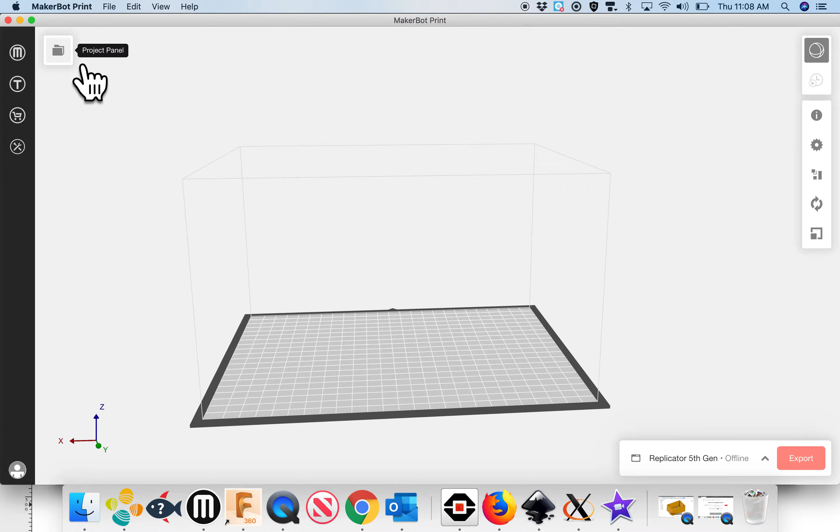You have the tools over here on the right. There's some print settings. There's position, rotation, and then the size or scale of each of the STLs that you bring in. Over here you've got the project panel. You open that up and we can add models to the workplace.

And so this is the printer right now that we have. It's the 5th generation Makerbot Replicator. And so this is showing you what the print bed for the Replicator is. So we're going to go ahead and add models. I've got, let's see, this recessed one. So there's my handle, my lid, and my box. I can bring them all in at the same time, or one at a time, so I can show you.

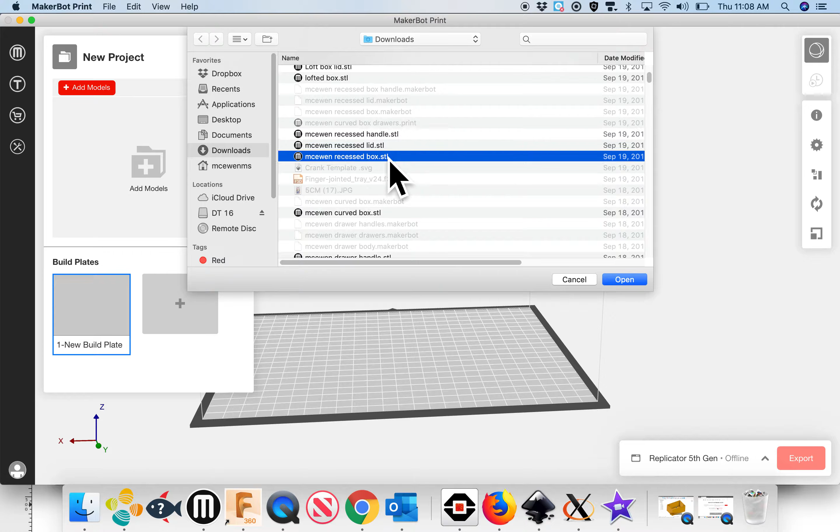Here it is. And again, for some reason that is beyond me, they are coming in not the correct size. So look at the scale, 10, 7, 15. So we're just going to make this a little bit bigger, and we'll go over how to scale correctly. So when you click on one of the pieces, it has a blue frame around it, and you can use the tools to do things to it.

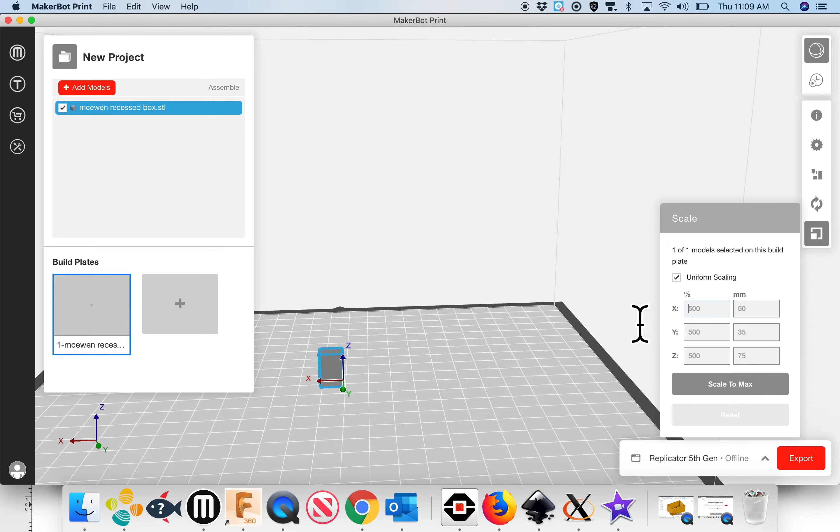So I'm just going to increase the scale by 500%, and it's going to do it across the X, Y, and Z. So if I press enter, you can kind of just see the box just a little bit better. If I click on it, you can tell that it is 75 millimeters tall, 35 along the Y, and then 50 millimeters along the X.

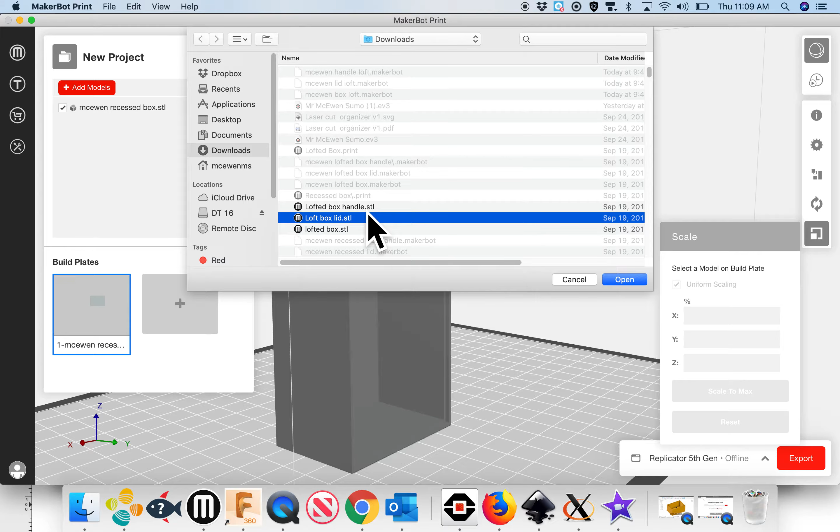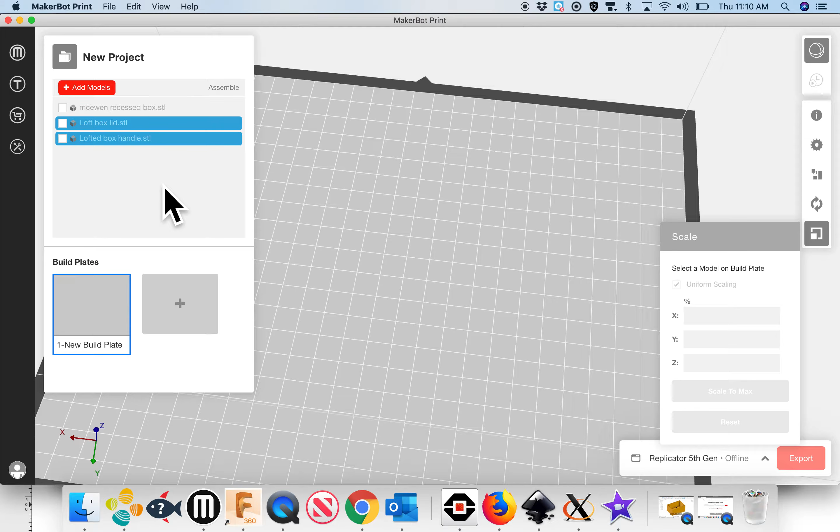Okay. So I'm just going to bring in the rest of the models as well, the lid and the handle. And since they're in and they're already highlighted, I'm going to do the same thing. I'm going to increase their scale by 500. Wait a minute. Those are not the right ones. Those are for a different box. So I'm just going to turn those off, turn my box back on, and I'm going to go ahead and add the correct model, oh, here it is, the lid and the handle.

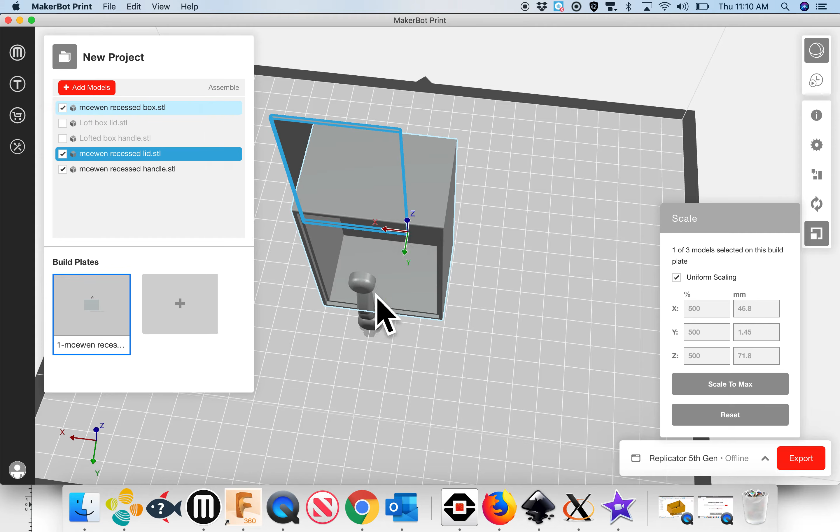And there they are. It doesn't matter they're sitting on each other. We'll fix that in a little bit, but I'm going to make them the same size so I can work with them. Okay, so that's the scale tool. If I click on one, I can see the scale for that exact piece, and I can turn that off. I can change these to whatever I want, but I'm going to keep the uniform scaling on because we need to make sure that all three pieces are the correct same size.

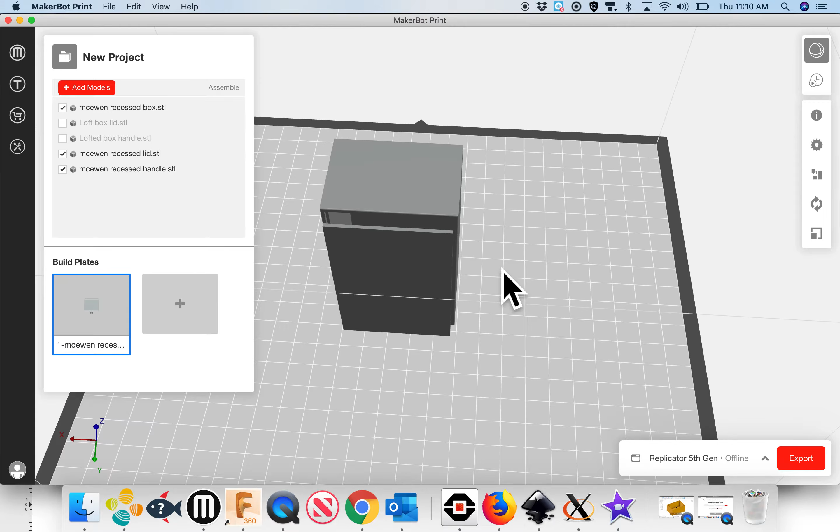So for right now, one thing I do right away is I click on Arrange, and I just say Arrange Build Plate. And you can use two fingers pressed to rotate a little bit so you can see they all now could be printed like that. But this would involve a lot of support material being printed inside so that it can print this top part. So we need to rotate them.

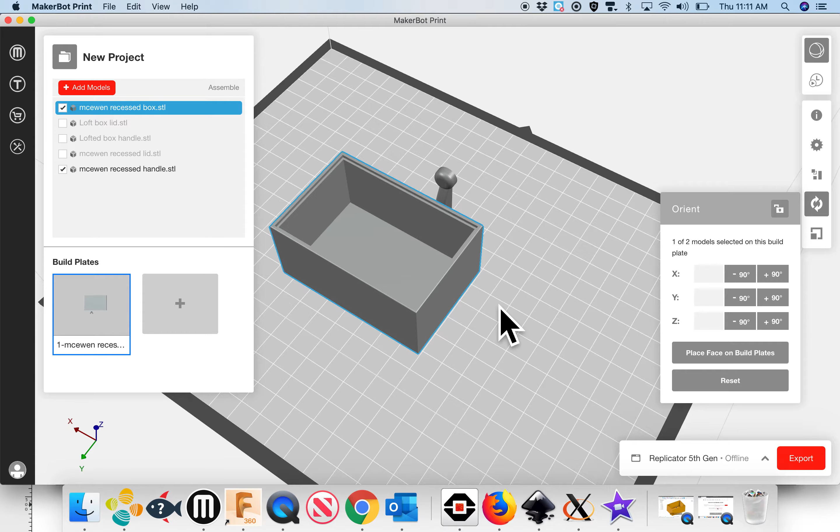So I'm going to do this with each one of them. I'm going to click on the Orient button. It's the little rotation button. And then I'm just going to click until I get it the correct way. This is how we want to print to avoid supports.

Same thing here. Let's see. Do I do this? No, that's going that way. So there's a little bit of hit and miss, because as you rotate around the bed, you're changing where the directions are. Okay, so that's right, but I want to flip this over. So I could do these rotations till I get that, or I can click on the Arrange button.

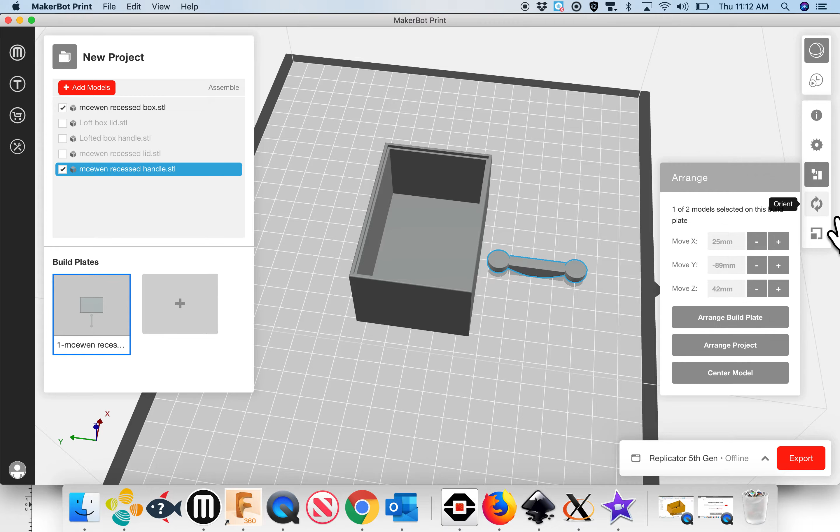And I can click on Arrange Plate. Oh, I'm sorry, Place Face on Build Plate. I'm going to click on this one, and I'm going to say that's the bottom, and it just flips it over. So again, play around with this a little bit with your pieces as you bring them in, move them around, flip them over, arrange it so that you can get used to using these tools.

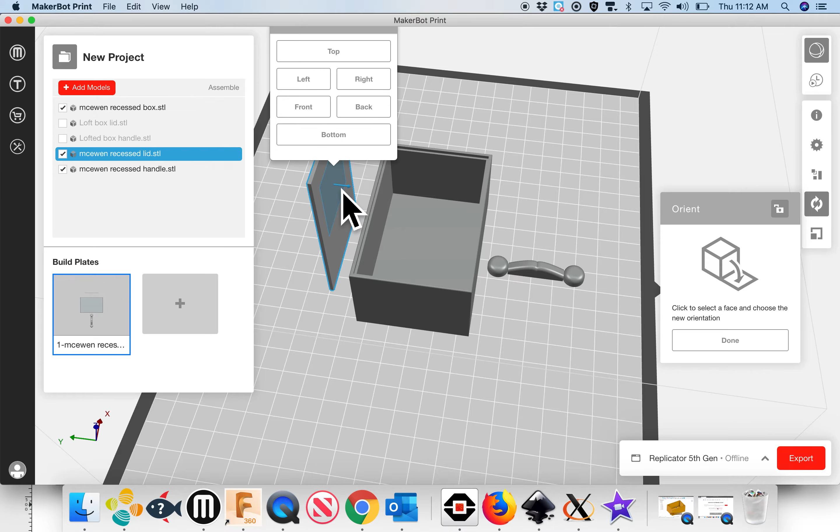Okay, so now I've got this one. I'm going to click on this. I'm going to say Place Face on the build plate. I want this to be the bottom. I think that's right. Okay, I'm going to go ahead and click escape. So I already got that. I'm just going to grab this, put it over here. And let's just say arrange build plate.

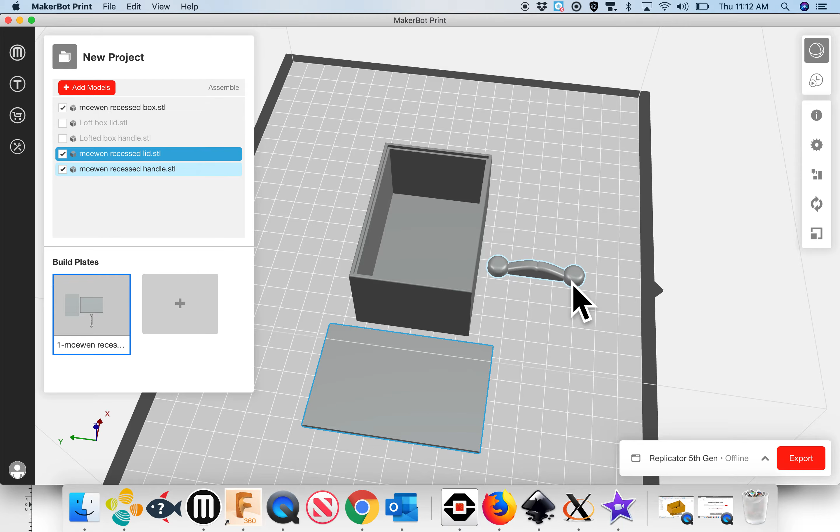Okay. So I've got my 3 pieces. They are separate, all 3 of them are ready to print. So I could, at this point, just click the export button. And then I would type in my name and what I'm printing. Okay? This is a recessed box with a recessed lid.

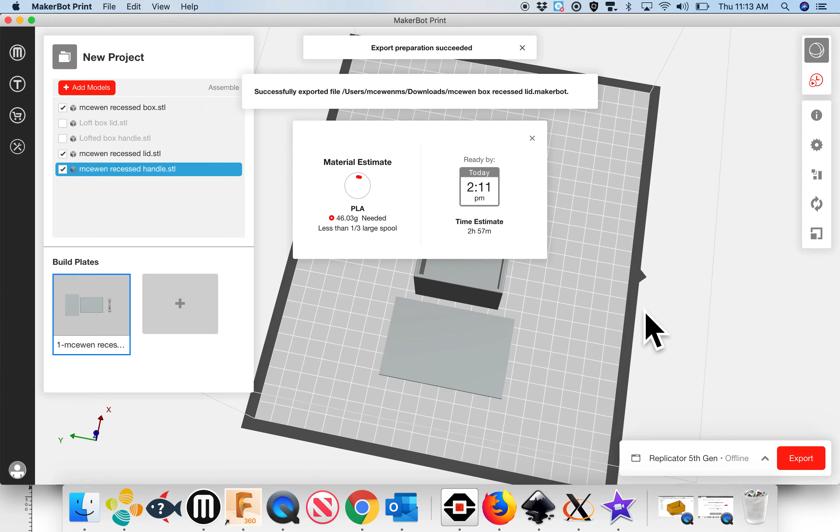Okay? Now, that will create what is called a Makerbot file. It takes the STL, it slices it for the 3D printer, and creates a file called a Makerbot file, or Maker Print File. But that file would print all 3 of these on the same printer. So it also gives you how much PLA or filament that you need, and it also tells you how long it's going to take. So this would take about 3 hours to print.

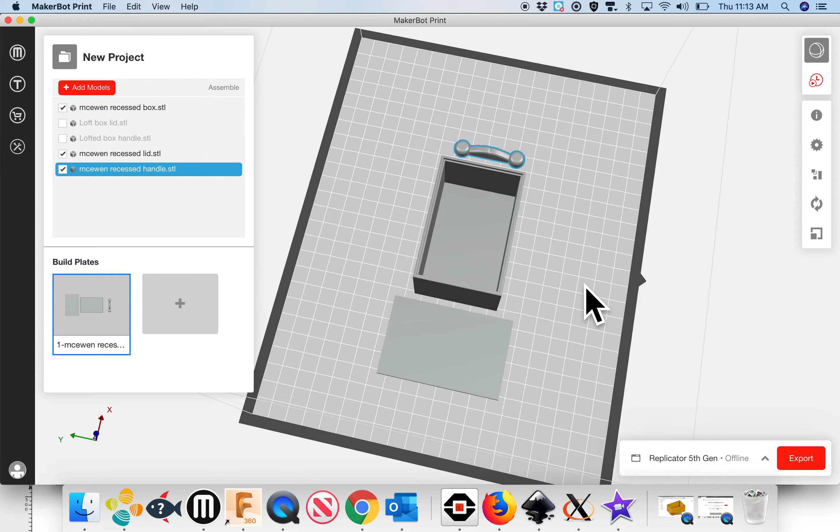So let's say that I do want to print them on 3 different printers because I want the bottom of the box to be one color, the lid to be another color, and the handle to be another color. Okay. Then I can come up here to these check marks and I can turn off the lid, and then I'm going to turn off the handle. Let's print the box one color. Then I would export this by itself. Because these are not checked and they're not on the build plate, they won't be included in the file.

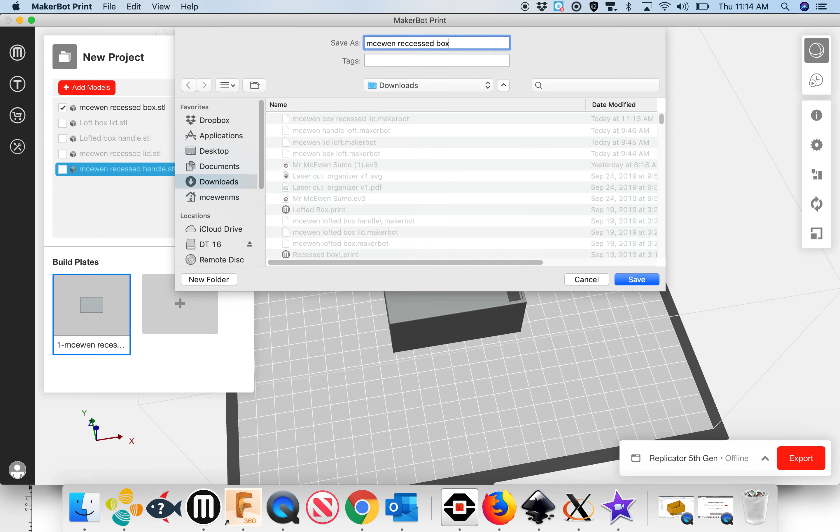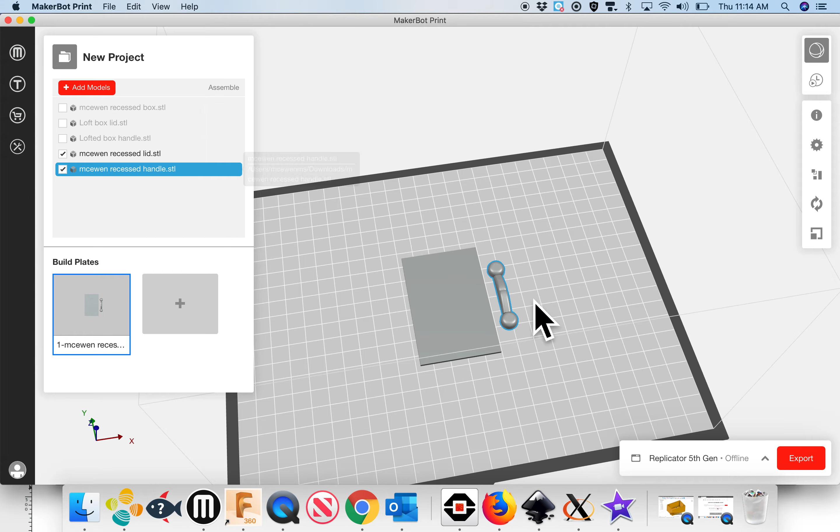So let me show you that. McEwen, recessed, box, only. I click save, and that should be in my downloads. You wait for it to prep that file. And then I can turn that off and turn, let's say I want the lid and the handle to be the same. So I can export those as McEwen, recessed, box, lid, and handle. I think that's fine. Okay, those are going into downloads.

So now those are what need to be put on the USB drive. Let's see, on this USB drive we have some Makerbot. The .makerbot is the file that Makerbot Print, the program, creates for the 3D printers. So if you look up here, you can see there's the STLs I used. But now I have the box only and the box and lid. So I can just drag them straight to my USB.

It makes that sound. I can check that they're on here. There they are right there, .makerbot. I would eject this and take it to the printer and then print using the print functions on the printer. The next video will be on how to use the printers.